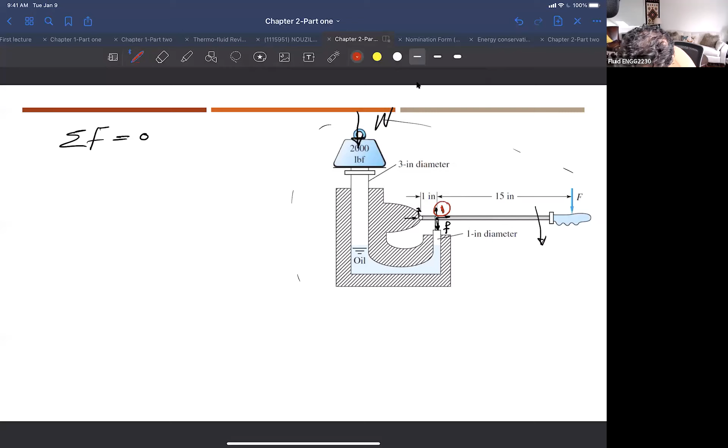But let's go point by point. Let's talk about what's happening here when this is moving in this direction. So basically you are putting some force here, F. And consider, for example, this is point 1. Let's use a different color. So this hinge here is point 1. This is a hinge here, this is a force here. If I break this element here, the force acting here will be the same force acting here. So this is F1 here, and this is F2 here. So I can say F in both directions are equal.

Okay, what else? I've seen some people talking about the moment. I think this is the right approach to take. What kind of moment? Where is the point we would like to apply the moment? Can I say that this is point 2 here, the hinge here? And now if I say that the summation of the moment around point 2 is equal to 0 for the static case, exactly. So if I separate this handle, I have this point here, point 2. Now I have F here, and I have f here.

I know the distance here. I know the distance there. The total distance is 16 inches. This distance is 1 inch. So if the summation of moment around point 2 is equal to 0, I can say that F times 16 will be equal to the small f times 1 inch. As long as the units on both sides are the same, I'm fine with that. So F will be equal to f over 16. And I can say that this is the first equation.

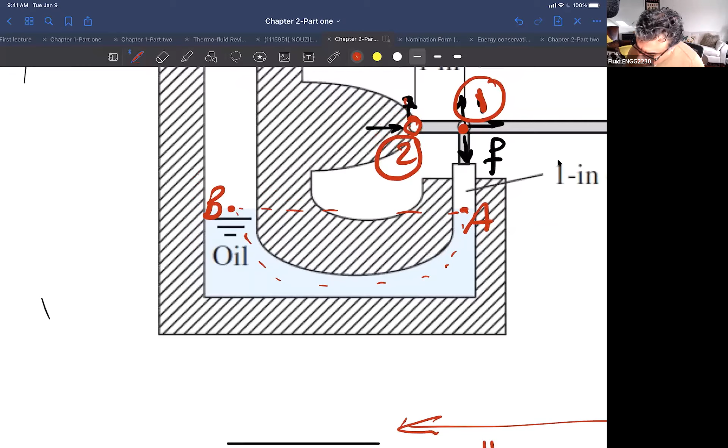The pressure inside the fluid in the horizontal plane is equal, once the fluid is connected, the same fluid. So I can expand this here, and I can say this point A here, and this point B here. Same fluid, same horizontal plane, they are equal, so in this case I can say PA is equal to PB.

Now for point A, I can relate the pressure at point A in terms of the force and area. At point A, it looks like the small piston that has a small area, that is 1 inch diameter, and the same force here, from the side that is reacting over the handle, is the same force acting on the piston if you break the element at this location. This is from the mechanics. Everything is static here.

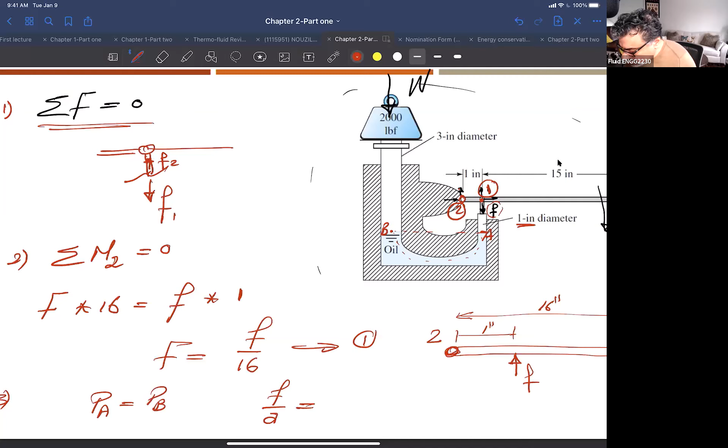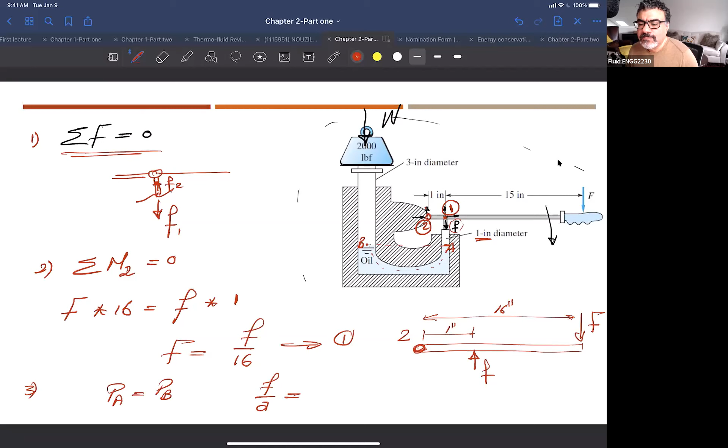So I can say, for example, this F here over the small area is equal to point B, which is W, the big weight here. So this is the weight W we are talking about, over the area, the big area of this piston, or the area of the piston that is big.

I can take from this equation F here will basically be A over A times W. And I can say that the area here is pi over 4. This is a 1 inch square, pi over 4, this is a 3 inch square. Remember, dimension is okay because all are inches. We are dividing both together, so there's no problem, no point of converting and then coming back. We divide both units at the same time.

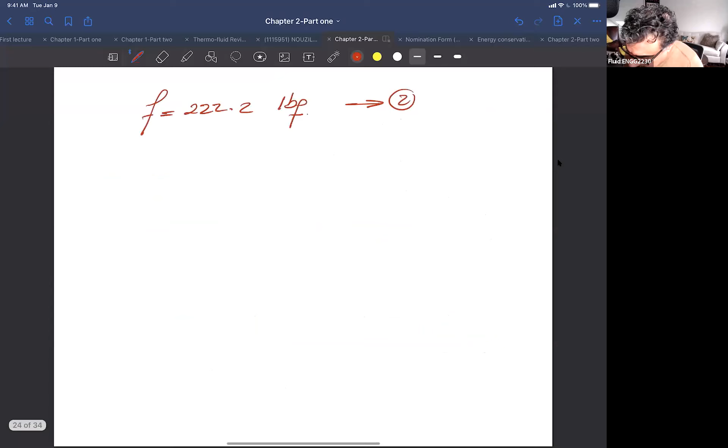The most important thing here to remember: if you put W in pound force, which is 2000, that means your F small will be in the same unit. So F small here will be, let me see when I calculated, about 222.2 pound force. So this is basically your second thing. If you go back to the first equation here, I can get F as F over 16, so which is basically 13.88 pound force.

You can see from this problem that you kind of reduced the force. First you reduce it by going from this big piston to the small piston. You have 2000 pound force, you only needed at this piston about 222. But having also this cantilever, this element here where you have the handle, you are even reducing this with a smaller value. And then you end up needing only 13 pound force in order to lift this heavy weight. Any questions on this?

As I mentioned, we're trying to do a simple analysis for a simple application in fluid mechanics. That's the idea of this course, trying to make you relate to actual applications in terms of the material we are covering. So hydraulic transmission, this is the first piece of information you have to understand when talking about hydraulic transmission. Most applications later on will be much more complex, but it's still dependent on transmitting forces based on one point that has the same pressure of the fluid, the other point has the same pressure.

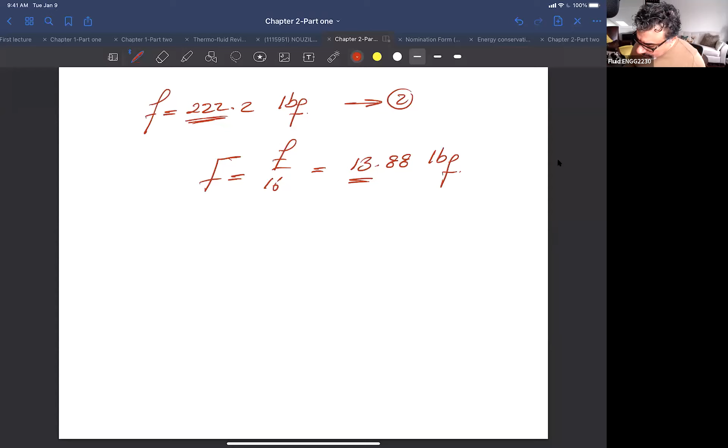It's just playing with the hydrostatic transmission forces, same thing when you are applying brakes in your car. Nowadays we have a lot of electronics, but again these electronics at the end are doing mechanical motion, doing a clamping action that is holding this disc that is rotating. So at the end, even though there's electronic transmission, when you push the braking handle, it leads to a point where there is oil — that's why when you go for service you change the brake oil. There's some hydraulic lines that basically have some oil there. The same idea: you apply very small forces at one point of this system, and you are magnifying these forces at another point in the system in order to achieve the much higher forces needed.

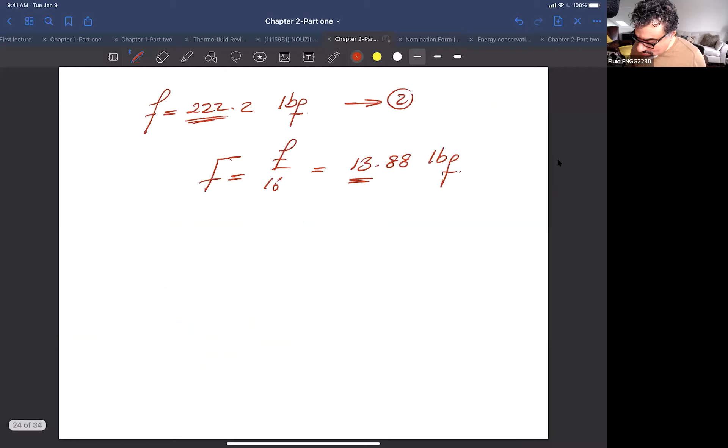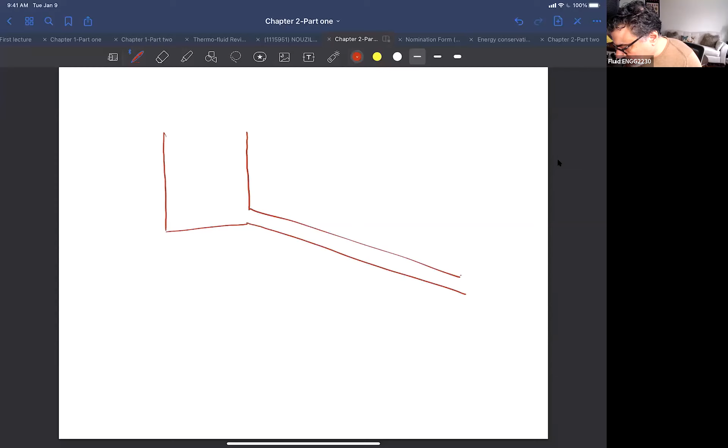Let's say, for example, if this problem is like this... I'm sorry, it's a good question.

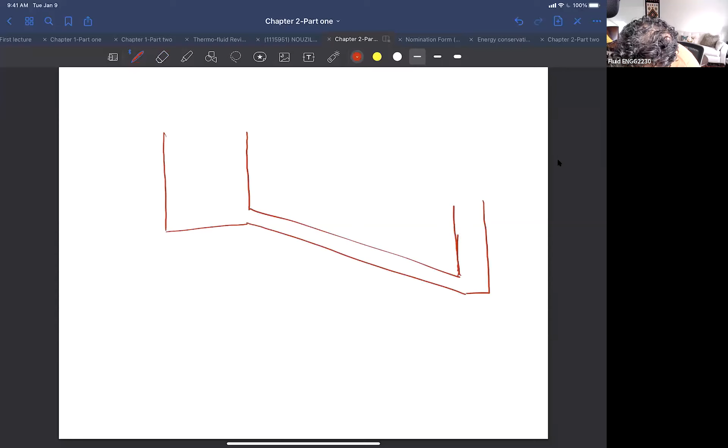So this piston area is like that. This is a piston. This is W, this is F, and this is the oil here. I know this distance here, I know this H, and I know this oil here. Specific weight is, let's say, 0.56.

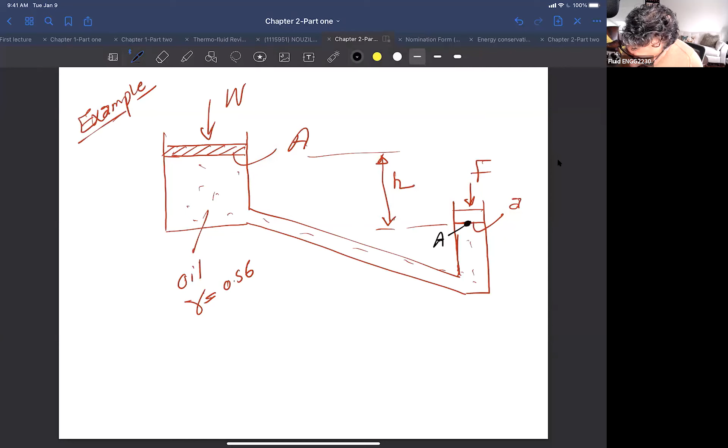What do you think is going to happen? What is going to change in this problem? Can I say, for example, in this case, that this point A and this point B have the same pressure? No. So how can I relate point A and point B in terms of pressure? What can I say about point A's pressure? Exactly, it is higher. So point A is point B plus gamma H.

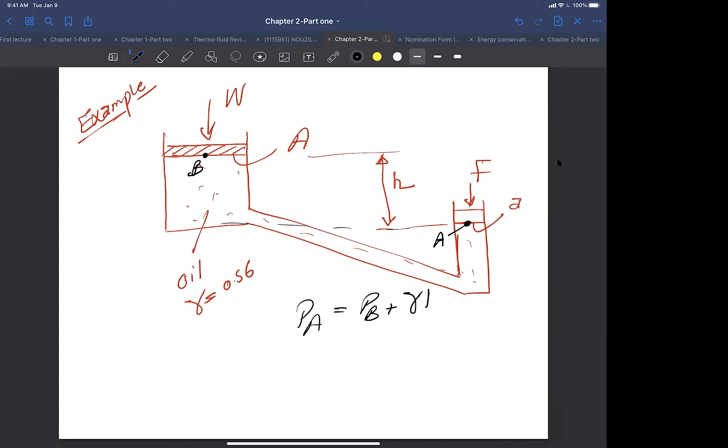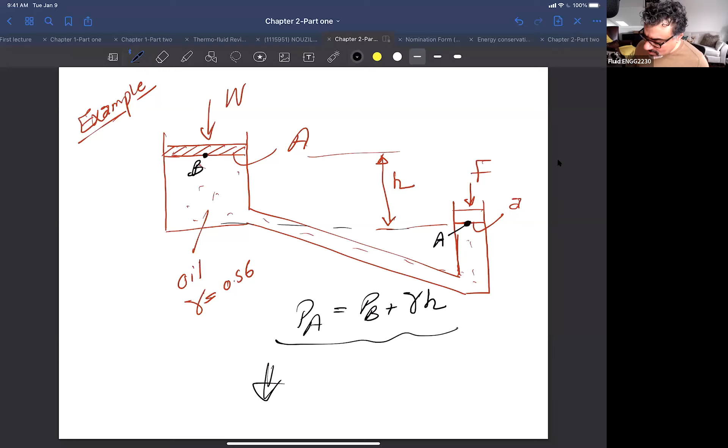You see, the only difference here is that if there is some difference between the two positions, I have to consider that. Please make sure that those putting the microphone on are muting it. So I have a difference in the height, which means the specific weight of the oil will play a role in determining the value for the second point's pressure. I don't have to complete this, but this is going to be the difference. It's just another piece of information that you add into your equation, and then you fix your other given parameters.

Okay, let's get into another topic. Today's lecture is about pressure measurement. You guys have heard a lot about U-tube manometers in your physics courses in high school, right? And piezometer tubes and stuff like that. You might have seen this kind of equipment or measuring device at some point in your science projects or science courses.

So the U-tube is a simple device using the mechanical motion of the fluid itself to indicate the pressure. Let's assume we have a tube like this, so this is a cross section. Imagine this is a fluid moving inside this, and what you did is basically drill a hole in this tube and connect it into something like a U-shaped tube. There is a fluid here, and we call it fluid 1.

And now we are using in this tube fluid 2. Let's say the other end of the tube is open here to atmosphere. So in this case, what's going to happen? Let's say, for example, if the pressure at this point is equal to atmosphere, what do you think about the fluid levels inside this tube?

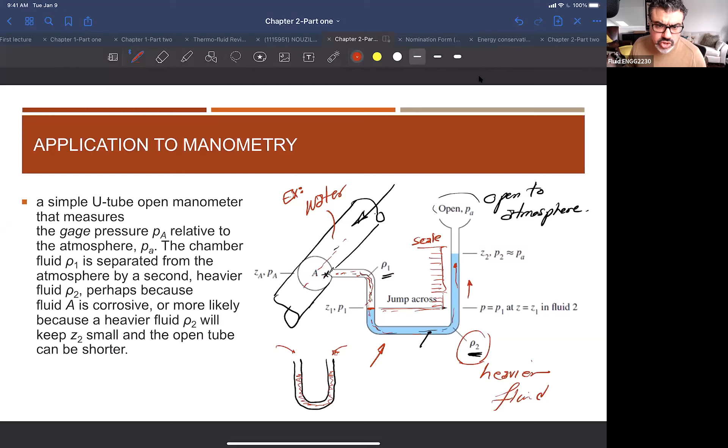I mentioned the U-tube manometer can measure either the pressure at a point, if the other opening is open to the atmosphere, or the pressure between two points. Let me ask you here, at point A and point B, what is the pressure at point A versus the pressure at point B? Let's have a fluid flow here.

A is greater than B. Some people are saying same. Okay, please don't be shy. Whatever mistake you are making here, we're just learning. You are not the first one - there are hundreds of people before you who made the same exact mistake.

Are they both open to atmosphere? No, right - this is a tube, let's say a long tube, and I'm just looking at two points inside this tube. So why are people saying pressure at A is greater than pressure at B? Why do you come up with this? Why do you think A is greater - okay, fluid flow.

Remember this, okay? Remember this, because in chapter 4 we're going to come back and ask: is it only pressure that is driving the flow, or something else? Okay, you drop some water at the top of the mountain - does it go down or go up?

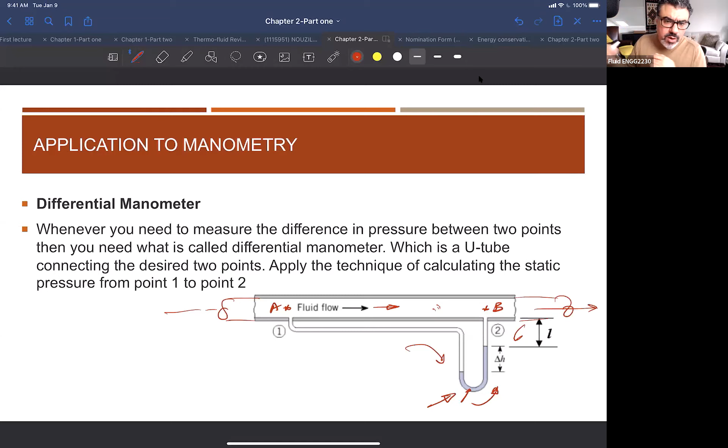Okay, so the U-tube manometer will measure the pressure between 2 points. First of all, the fluid density inside this U-tube manometer has to be greater than the specific gravity of the fluid flowing here. So it has to be a heavier fluid, right? And of course, the pressure will direct the U-tube elevation in order to show which one is higher and how much higher from one point to another point.

So I mentioned to you, if you have variable pressure, the U-tube and these kinds of devices are not appropriate for measuring this pressure. How about if I need to measure a very, very high pressure difference, let's say 20 bars? If I get a U-tube manometer, I need a very long tube in order to measure this, because the pressure value is gamma H, right? So to measure very high pressure you need a long one, and in many applications you cannot afford this.

You only use a U-tube manometer when you want to see by eye what is happening there. But it's going to be a very limited application, right? The other type of device that measures pressure is called the Bourdon tube gauge, or the pressure gauge. You will see this pressure gauge in many applications. Everywhere you go in any industry, you will see these dials measuring the pressure.

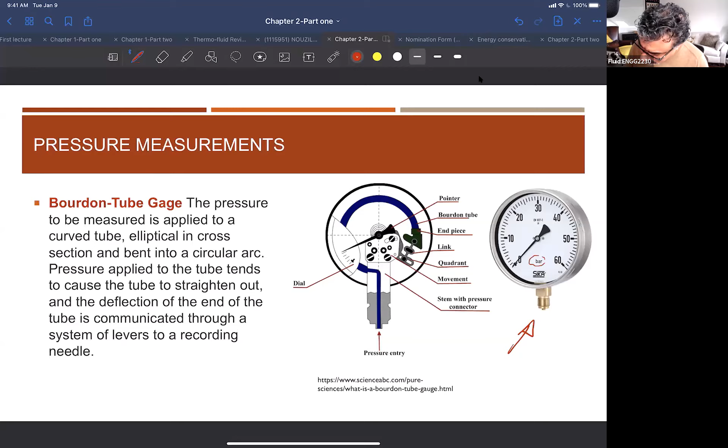And you see here, for example, the unit for this case is bar, right? The bar is known as 100,000 pascal, or 100 kilopascal. So it's just a scale of the pressure as we explained last time. But the idea of this Bourdon tube is the deflection of the tube as the pressure increases inside this tube. Simple, right? So I have a tube like this. Let me just add this. I have a tube like this.

And if you take the cross section here, you will see it's something like that. So the cross section of the tube is not a circle. It is designed, and it has a long story if people want to read more about the design itself. But it's a simple theory. When you have a fluid here, of course, this tube is closed from the other end, right? So the tube here is closed from this end, okay?

So what's happening if this fluid pressure increases? This tube will basically deflect, right? So it will be something like this. It will move according to the pressure, like this or like this, depending on the pressure inside. There are even some toys, when you push air inside them, they kind of open up, right? So this is a similar idea to the Bourdon gauge.

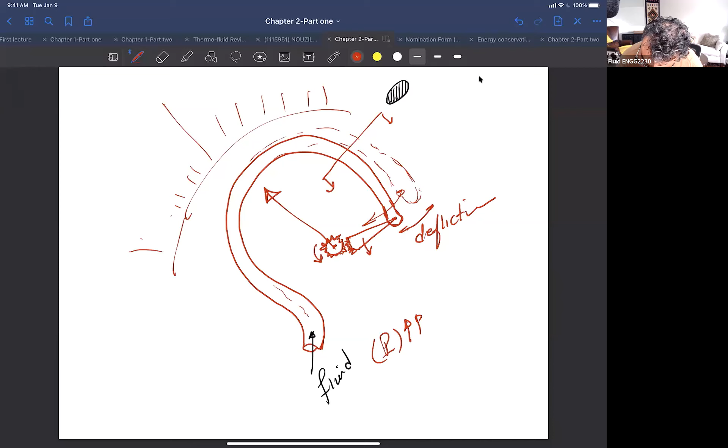How about if you take this motion and connect it to, for example, a gear here, or some kind of mechanism? Once this moves, this gear moves. And now if you have a pointer here, I can calibrate this motion, the angular motion of this gear, with respect to the deflection and the pressure here. So if I have a scale here, pressure, I can basically read it, right?

So I can find out the value of these pressures. Very simple kind of idea, right? And it's very, very commonly used in many applications. Remember that for this kind of application, you will see a lot of these dials available, depending on the pressure that you are measuring.

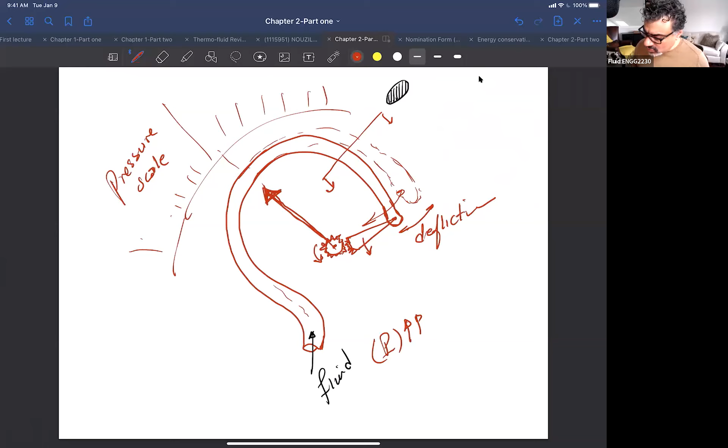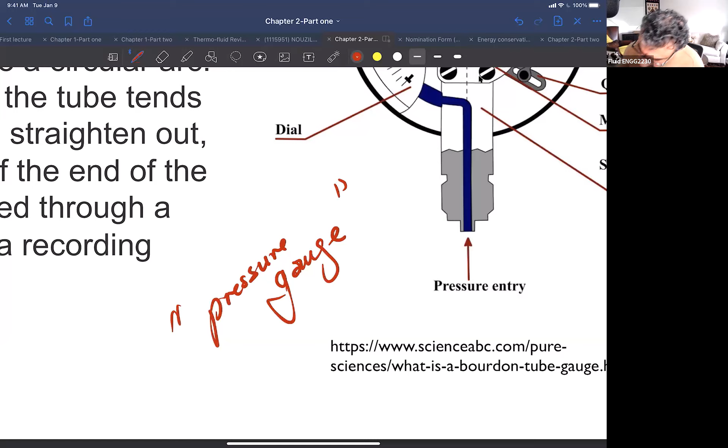So many times when you are walking around an industrial facility, they call it a pressure gauge, right? So it's a gauge where they are measuring the pressure. How about the same question I asked before? If I have a pressure that is varying so quickly, like 0.01 second, 0.1 second, even a second, do you think Bourdon tubes will be a good device for this?

No. Why? Because again, you're looking at the dial. If the dial keeps doing like this, it's going to fluctuate and you don't see what's happening, right? So you need to find something more sensitive. And of course, again, it is related to the inertia. Why? Because it's a mechanical motion. All mechanical systems have much more inertia than electrical systems. You agree with me? Because electrons can move very fast, right?

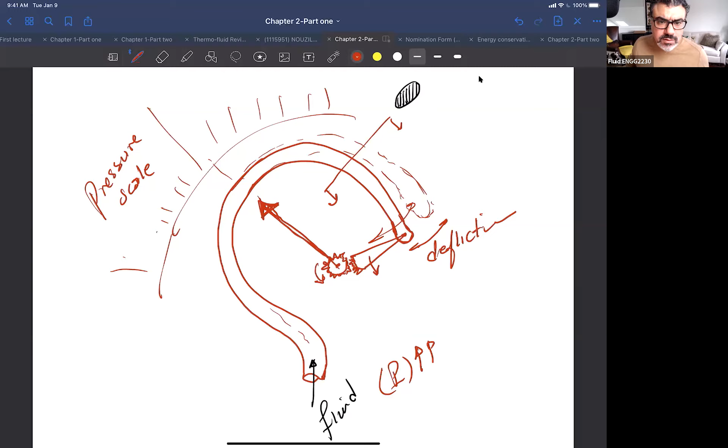And that's why we come up with a different way of measuring the pressure inside the system using something called pressure transducers. Sometimes we use a piezoelectric material that, when you actually push it, will charge to a different value, and the charge here is basically the current moving inside the circuit.

Or a wire, if you apply a certain tension to this wire. So if you have a diaphragm here, for example, let's say this is our diaphragm, and you put a wire on this diaphragm, and now we are stretching the whole diaphragm, which means that you are stretching the wire. And once you stretch the wire, if this wire is very sensitive, the resistance of this wire will change depending on the tensile stress that you are applying.

And that's why some of these devices we call strain gauges. So the strain gauge uses the resistance of a wire to relate the pressure. And how do we relate the pressure? By applying these pressure forces, which make some deflection of this device that we call the diaphragm in this case.

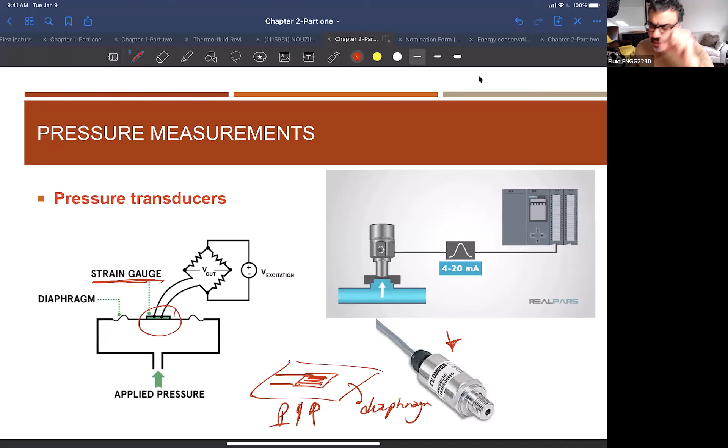Another application, as I mentioned, is related to a piezoelectric material. Once you apply a certain pressure force to this material, the charge inside this material will be different, and the current in the circuit will be different. You guys can spend time looking at this. You will see this on many websites of manufacturers supplying different kinds of pressure devices. There are hundreds of other devices for this.

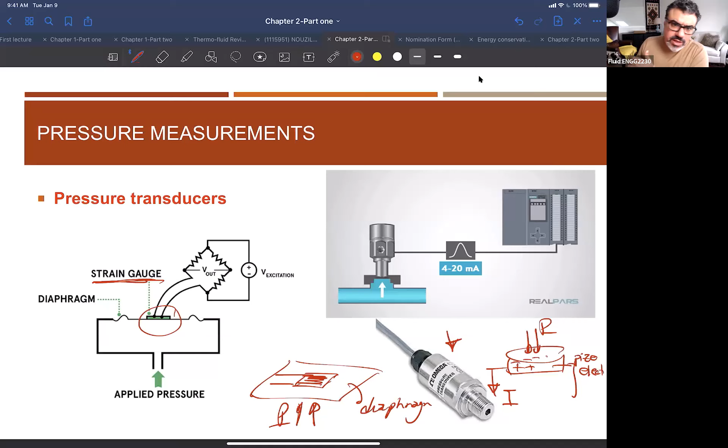What I want you to understand in this part of the lecture is that the measuring device has some inertia. If you are using a fluid to measure the pressure, you need a head of this fluid, right? If you have a dynamic pressure, you have to find a different system to measure these pressure variations.

Let's look at this example here. I have a tank, and this tank contains some air, gasoline, and glycerine. The pressure gauge at A is 1.5 kilopascal. So this pressure here at A is 1.5 kilopascal. And all the fluid is at 20 degrees C. I just need to determine the elevations Z in meters of the liquid levels.

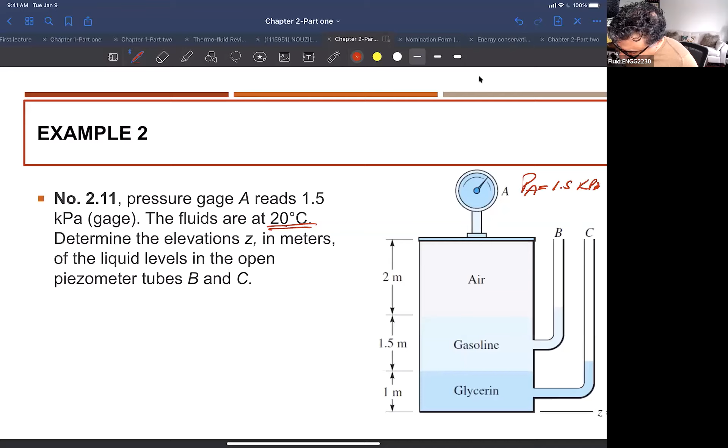So where is it? You see here, there is some distance here I don't know, right? I want this elevation from reference point Z. So let's say here, this is point A.

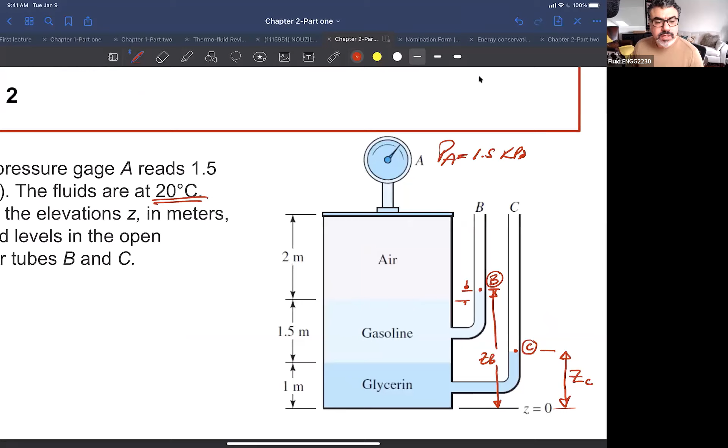This is point B. This is point C. Okay, so I need ZB, and I also need the level ZC here. Okay, so how can we start this? Let me ask you a question. What is the pressure of the air inside here?

Let me see if you guys are on the 1.5. Anyone else? Everyone knows that the pressure of the air is 1.5 kilopascal? Excellent. I saw some common mistakes in many past exams. People consider the pressure of this air is atmospheric. You remember we discussed this last time. Pressure of the air will be equal to atmosphere if the air is open to the atmosphere, right? If the air is inside the tank, the pressure could be any value, and it's given in this problem as 1.5 kilopascal. Okay, how can we start this problem?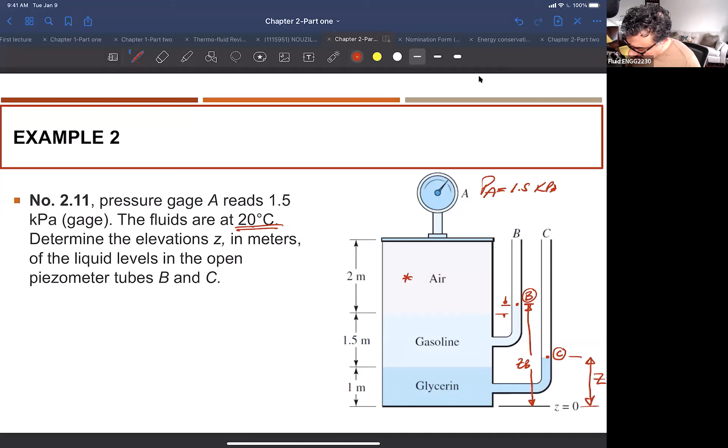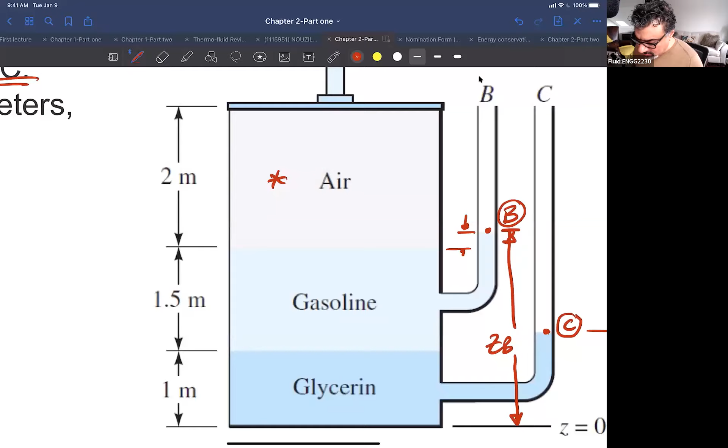Okay, how can I start this problem? Here it's very simple. Let me ask you first. Gasoline, glycerine and air. Which one is heavier here? What is the heaviest one? Glycerine, right? If you go to table A3, you will find the specific weight of gasoline is 6670 Newton per meter cube. You'll find glycerine is 12360 Newton per meter cube, right?

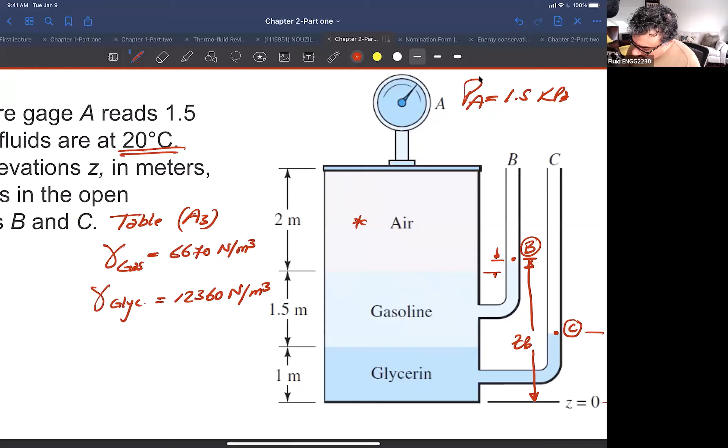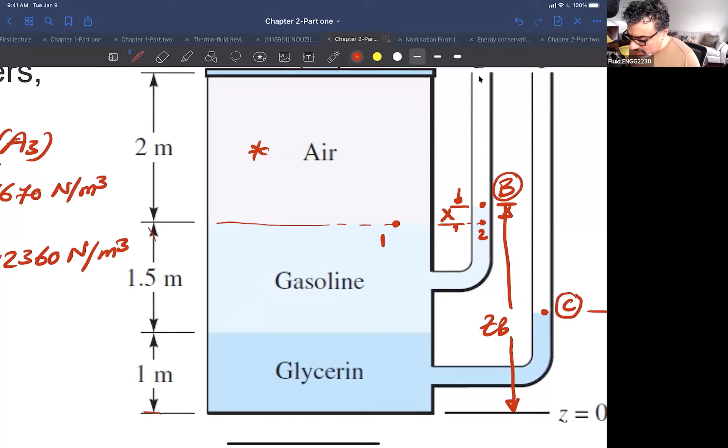And that's why it's put like this way, right? So you have the glycerine at the bottom, gasoline, and then the air at the top. Of course, these values are given. So you see here, this is 1 meter and this is 1.5 meters. This distance here, if I call it X, if I found X, I can get ZB, right? So if I call this point 1 and the same point here point 2, point 1 and point 2 have the same pressure because it is the same fluid, same horizontal plane. So P1 is equal to P2, okay?

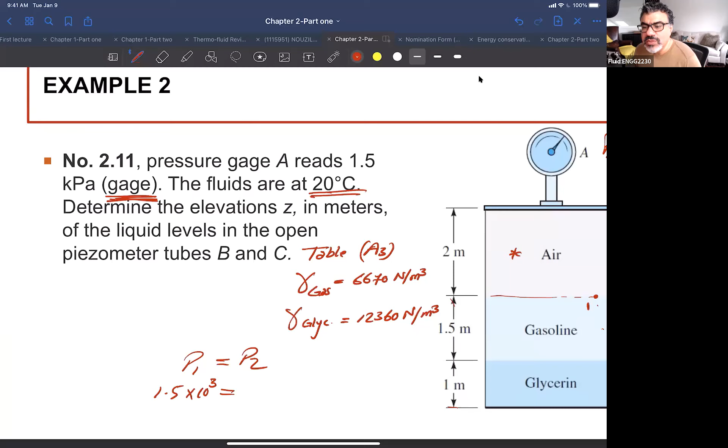And what is P1? P1 is 1.5 kilopascal. Just make sure that we are using the same unit, Pascal, because we have Newton per meter cube, SI units. This is kilo, so we multiply by 10 to the power 3: 1.5 times 10 to the power 3 Pascal, which is Newton per meter square. How about P2? This is open to atmosphere. What is the atmospheric pressure in this case? 0. Why 0? Because the value for the air given in this problem is gauge, which means the reference is atmospheric, which is 0, right?

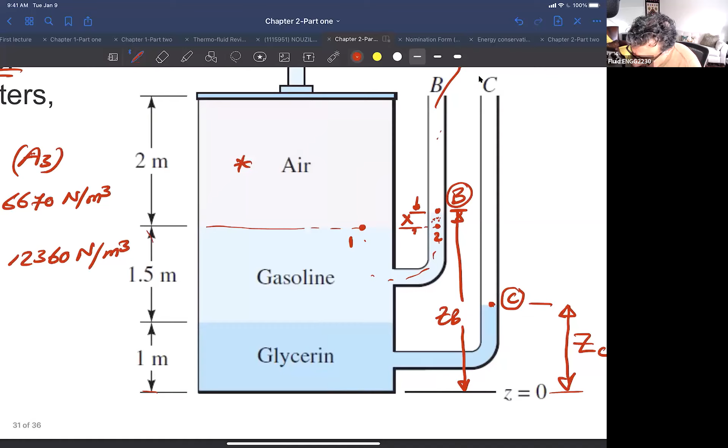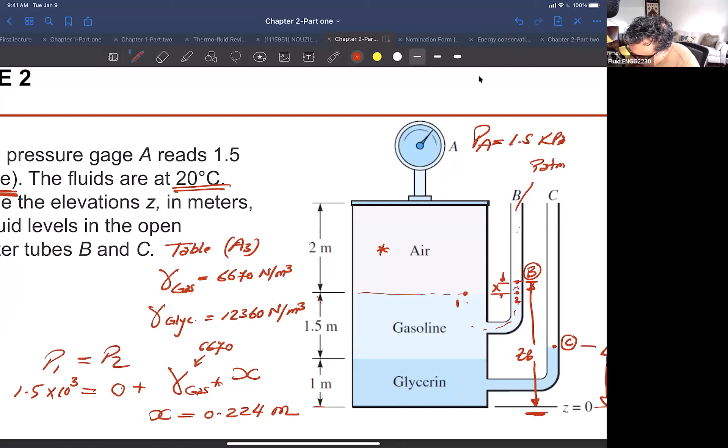So I have 0 here plus this distance, which is filled with gasoline. So it's gamma of the gasoline times the height of the gasoline, which is X in this case. So I have 6670, so I can find out X. When I calculate it, X is 0.224 meters. If I want the level not from this point but from the reference Z, I just add this distance: ZB is equal to X plus 1.5 plus 1 meter. So it is about 2.724 meters.

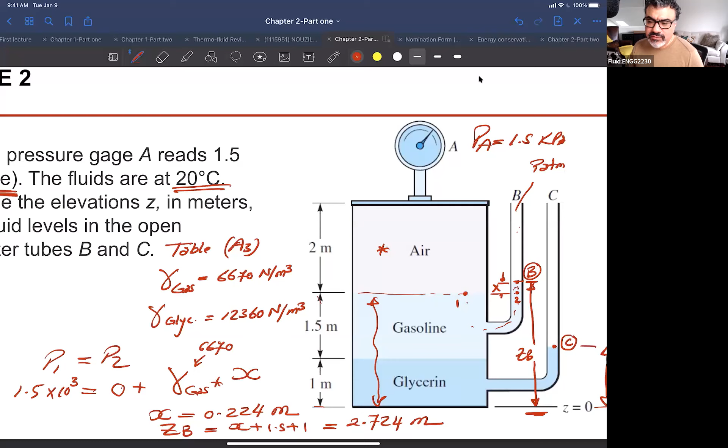What was the 0 again? The 0 is the atmospheric pressure, because the atmospheric pressure is our reference, because the pressure of the air is given in gauge. That means we are using the atmospheric as a reference. Okay. Sorry, I just added this without. Oops.

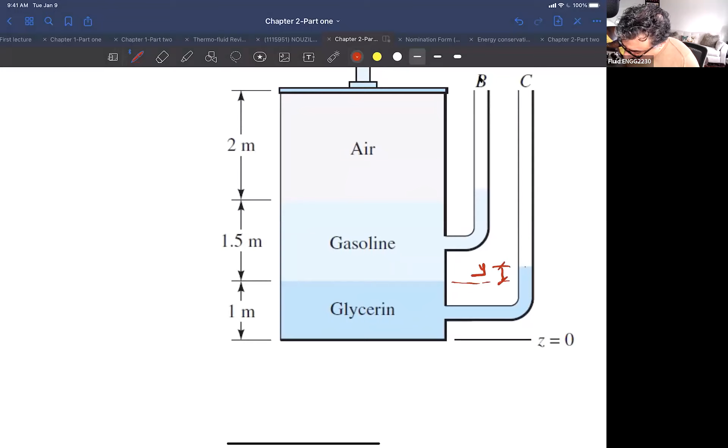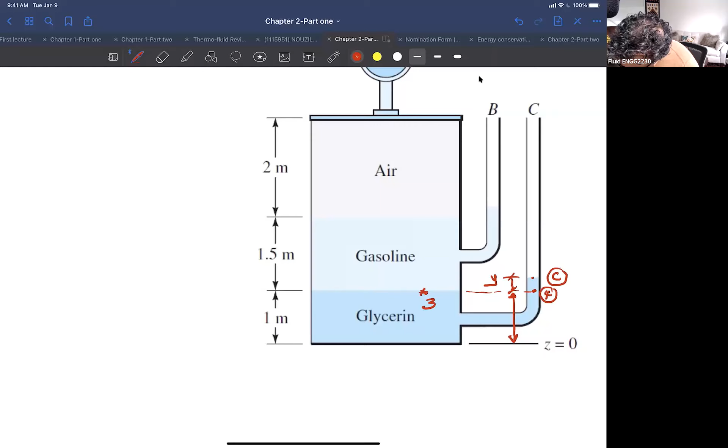So how about this elevation here? I know this distance also. It is y, right? If I know the distance, I will just add this value, so I can find out Z of point C. In this case, this is point 3 and this is point 4, right? Same horizontal plane, same fluid. So P3 is equal to P4. So can you tell me what is point 3?

What formula, Mohammed? What formula did we use? You didn't even start there, right? Gamma H. Well, I don't call this an equation that we have to give you in order to solve. These simple concepts have to be in your mind.

Okay, so in this case, what we have for the pressure at point 3? No, don't be sorry. Don't be sorry. I want you to remove from your head that we have to really find out the formula and apply it. Okay. So I've been talking about this all the time. Please start from the basic principles.

There are some people who, for this kind of device here, have an equation at the end and just substitute the values. That's not the idea. If you start from the basic principle, the same way as I'm doing now, you don't need to understand so many formulas. In a few slides, I will show you some equations that will be given to you, because you don't have to memorize them. Okay. Don't ever be sorry about any question you ask.

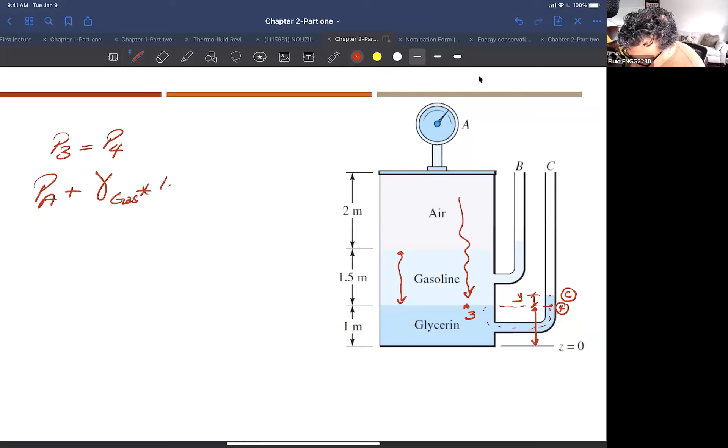Okay. So P3, P4. What is P3 in this case? What is P3 in this case? Again, 1.5 plus what? You are here, you are carrying all these loads, right? So in this case it will be the P of the air plus gamma of the gasoline times the H of the gasoline, right? So it's 1.5. Now we are at point 3, okay?

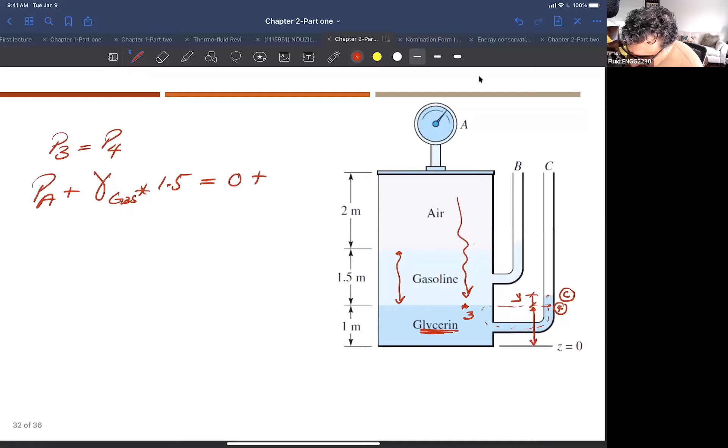Equal to, what is P4? Exactly 0 plus, if this distance y is a distance of glycerine, right? So I have a distance we call y, times gamma of the glycerine. Okay. So this is 1.5 times 10 to the power 3 plus gamma of the gasoline, 6670, times 1.5, equal to 0 plus y times the glycerine, 12,360. I can get y from this equation simply by calculating this number.

So it's 0.93 meter. And it looks like Z of point C is Y plus this distance here, right? So it's 1 plus Y, which is 1.93 meters. Okay, they're very simple types of problems. Okay.

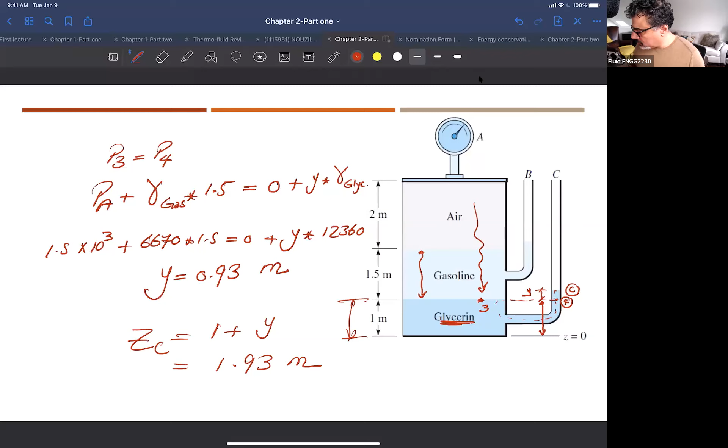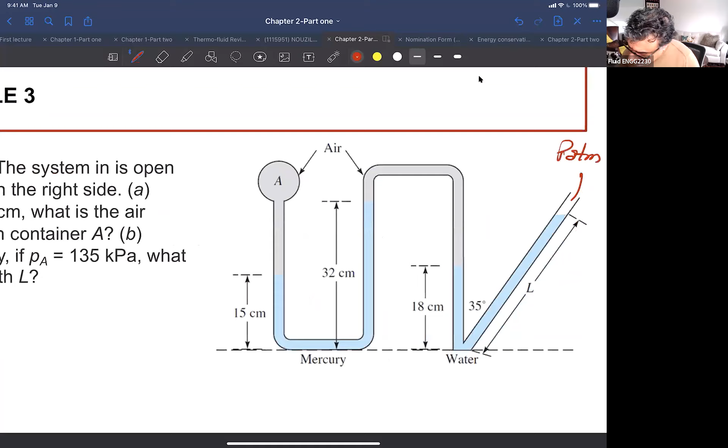There are some other problems. I want to get into other parts of the material, so we'll just start this problem and then you can complete it yourself. Okay. One important thing about this problem is the system is open to atmosphere. So this is atmosphere. Okay. On the right side, this L here is given as 120 centimeters. And remember, this is an inclined surface.

Does the pressure increase in depth with the vertical distance or the inclined distance? It's the vertical distance. Remember, it's basically because of the weight, and the weight is acting vertically, right? So I don't care about any inclination of the fluid level. Between this point and that point, it's only changing because of the gravity force, which is acting in the vertical direction. I think some people missed this point here.

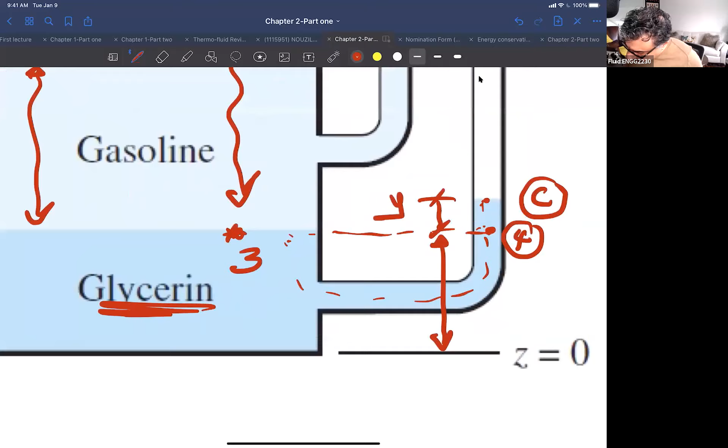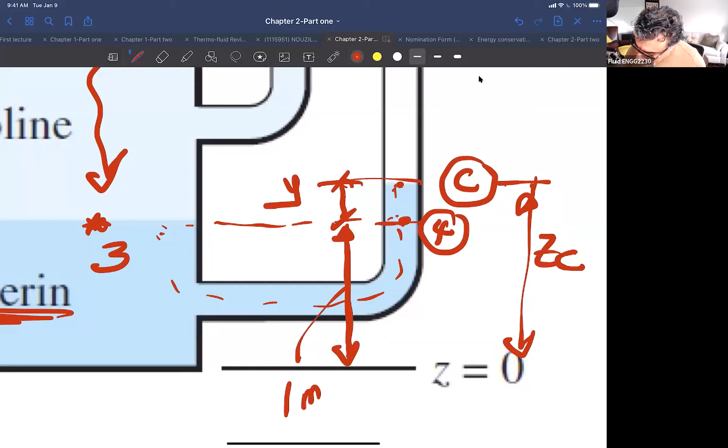I'm getting Y, right? And I need ZC. So what does it have to be? It has to be this distance plus this distance, right? This is 1 meter. So you can just add 1 plus Y to get ZC. Let's go back.

Okay. So the first thing is make sure that you understand what we're talking about here. This is 35, right? So what is the distance here? This is sine, this is cosine. So this vertical distance here is L cosine 35. Okay.

The other trick in this problem is you have air on this side, and you have air on this side. Okay. And he's asking about this PA. So we need to find this PA. And then you can solve the other problem: if PA is given, what will be the length L? But the first problem here: if L is 120 centimeters, what will be the pressure at point A?

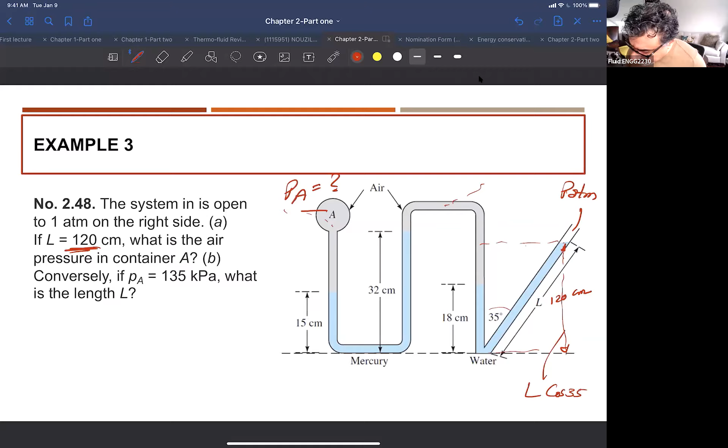There is air here, and there is air here. What do you think the pressure is at this point and this point? They both have air, right? Agree? Same, right? Yes. Everybody agree on this? The pressure of this air here equals the pressure of this air here?

If the air is in the same space, like the air in my room here, and the distance is, remember we talked about the distance for the air, it only changes if you are flying an airplane at a very high altitude. But once you are in the same space, the pressure is the same, right? Let me tell you something, okay?

So the pressure, let's say, for example, this is 0.1 here. Okay, let me just here. Well, let's call this 0.1 here, okay? And okay, so we have air here, so I have the pressure at this point, and this pressure, let's call this 0.2, or I don't want to call it that, okay, just let me call it A, B, C. This is B, this is C, this is D, right?

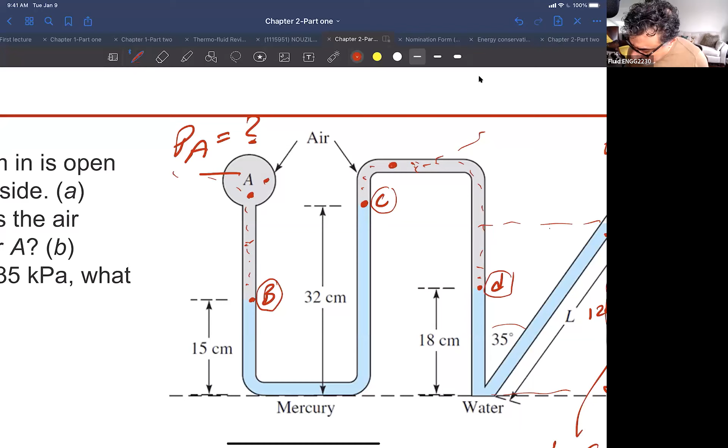Okay, so do point B and point C have the same pressure? No, right? Point B has the same pressure as this point here, right? Let's say B dash here. Why? Because it is the same fluid, horizontal plane, static, everything, right? So I can say P at point B is equal to B dash, right? And what is the pressure at point B? Is it the same as point A or not?

This is all air. Yes. Why? Because it's all air, and the elevation of the air doesn't change the pressure that much, because the density of the air is very small. So point A here is basically equal to this point B dash. Okay, this is the first equation.

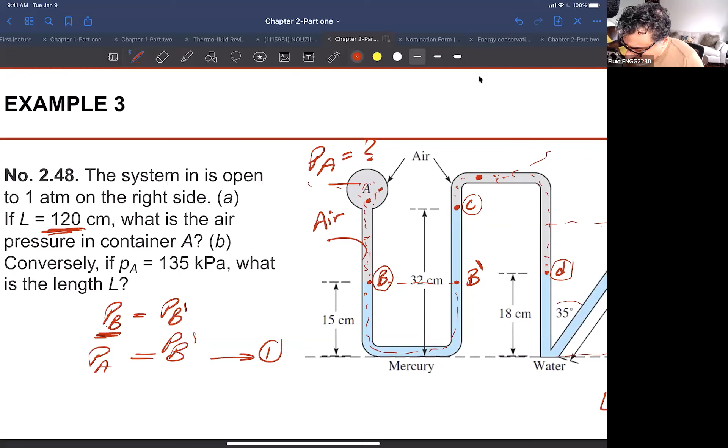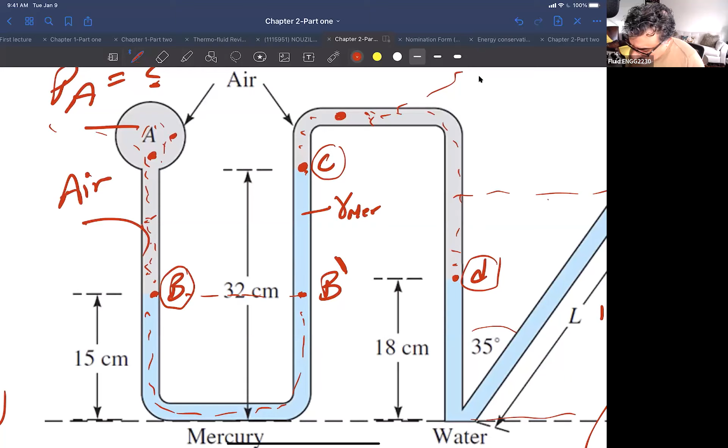Okay, how about point C and point B? Which one is higher? B or B dash, right? So B dash is higher because it's basically at the bottom, and then you have a fluid here that is mercury, right? This is gamma mercury. So I can say this point B dash is equal to point C plus gamma mercury times H, which is this distance here, 0.32 meter minus 0.15. So the distance here is this whole distance minus this distance, right? So this could be your second equation, okay?

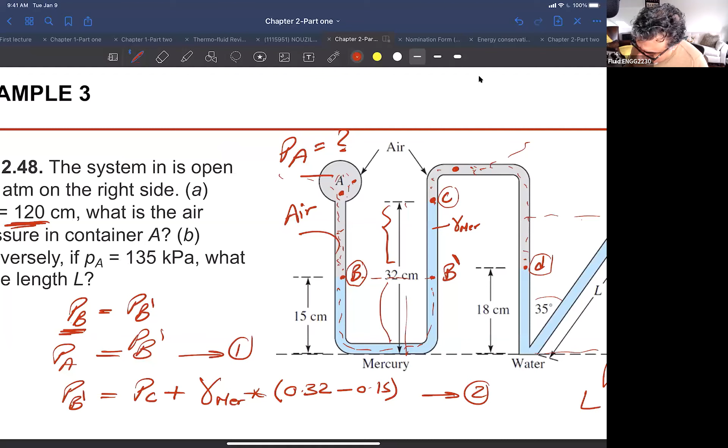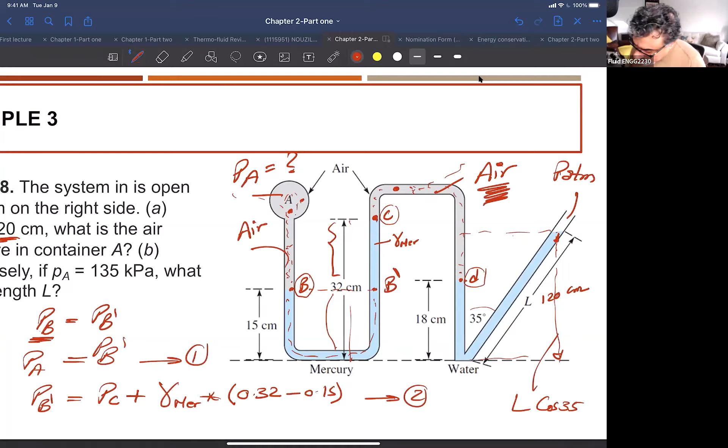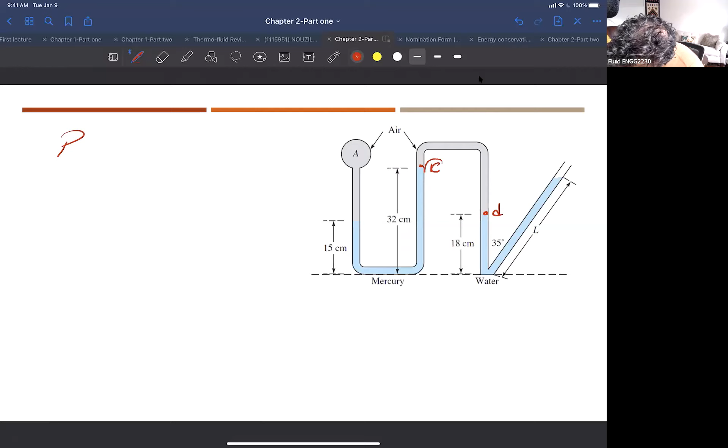How about point C and point D? D is higher. Somebody is saying D is higher. This is air. You still think it's higher? It's the same, right? So basically, in this case, point D, this is point C. Okay. Yeah. So point D is equal to point C, right? So basically I have this, right?

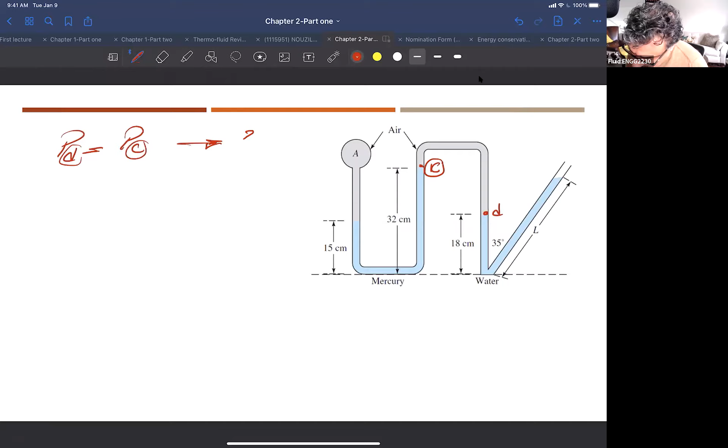So I have a problem here. So we have, this is 1, 2. I can say this is number 3. How about this point here? I can call it D dash. How about point D with respect to point D dash? So remember, you see here, point C, this is point D, right? D dash here from this side is what? This is atmospheric. And it's going to be some distance here, right? So what is this distance here?

So PD is equal to PD dash, which is 0 atmospheric, plus, let's say this is our X, right? What is X here? So if this is 35 degrees, it's going to be this distance, you see this distance here. So I need this distance. So I can say that it is this whole distance minus 18, right? So this whole distance, remember, is L.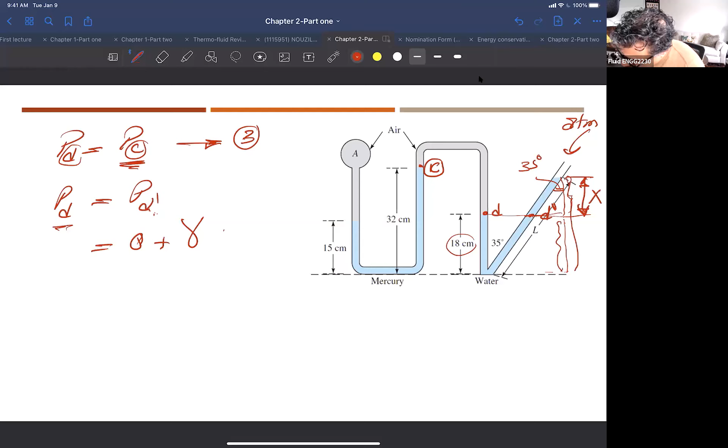First, it's gamma of, what is this? This is water. So it's gamma water times the distance here, which is L cosine 35° minus the 18 centimeters. Okay, of course you have this. It looks like it's going to be straightforward. I know it's step over step over step, but this is a way that if you have any complex problem, you can divide it into small little things. Okay.

I don't know what you mean, Adam? The shape is given in the problem. We give a vertical. I don't think you should change the layout of the problem in order to solve the problem. Okay, let me just conclude this, and then I will give you a simple trick that people use all the time to solve these manometer problems, right?

But let's say here, for example, this is your fourth equation, you're taking PC and putting it here, right? Because PC is PD, right? So from equation 3, you can put it in equation 4. And now from here, you see this PC here, you can put it in equation 3. And then you have PA here, right?

So you substitute from equation 1 into 2, and from equation 2 into 3, and then from equation 3 into 4. You will get the number that you want, okay? Some people already know fluid mechanics fairly well.

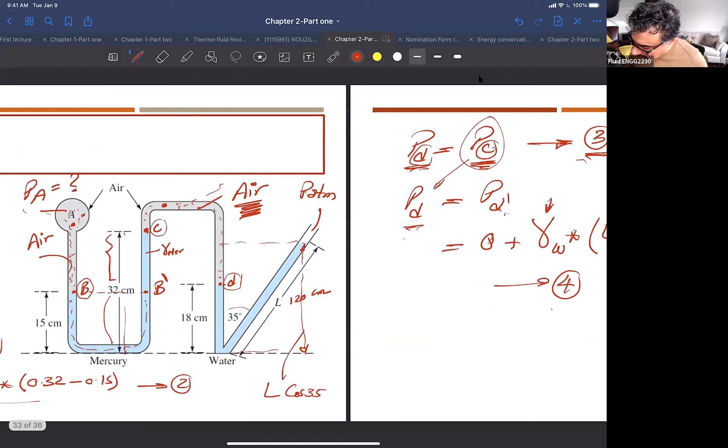But it has to be in the same fluid. So people will say, for example, let me just do this. They said I started with one point, one side. So this is P_A, okay? As I go down, okay, I go down like this, but this is air, it's gonna be the same, right? So now I'm here, okay.

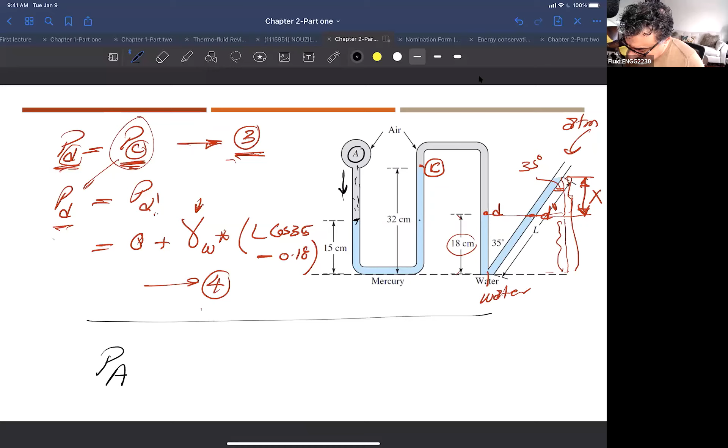So every time I go down, I add; every time I go horizontal it's almost the same, right? So in this case, P air, all the time is just P air. There's nothing increasing here because it is gas. I move here, no change, right? Now I'm going up, so I decrease, right? Because you go down, you increase pressure; you go up, you decrease the pressure.

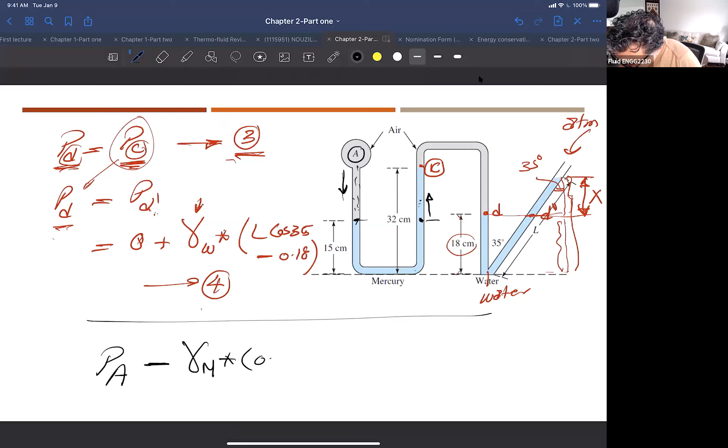If you go up like this, that means it is minus. And now you are basically in mercury. That means gamma mercury times this distance here. So it is 0.32 minus 0.15.

I go from here to here, nothing changed. To here, even nothing changed. Why? Because this is all air. You see here? So now I am still there, right? Still the same value. Now I go horizontal, same value, okay.

In order to go all the way, that means I have to go like this, so it's gonna be minus again. But minus will be basically what? Minus this distance here. And what is this distance? It is L cosine 35 minus the distance here, which is 0.18. Equal what? I am now here. Equal what? What is the pressure here?

Zero, right? If you look at this equation and you look at the combination of equations 1, 2, 3, and 4, and you put all the equations together, you will end up with the same exact equation here. So some people, they just go one step at a time. You increase as you go down, decrease as you go up. Make sure that when you are going horizontal, you are in the same fluid, okay?

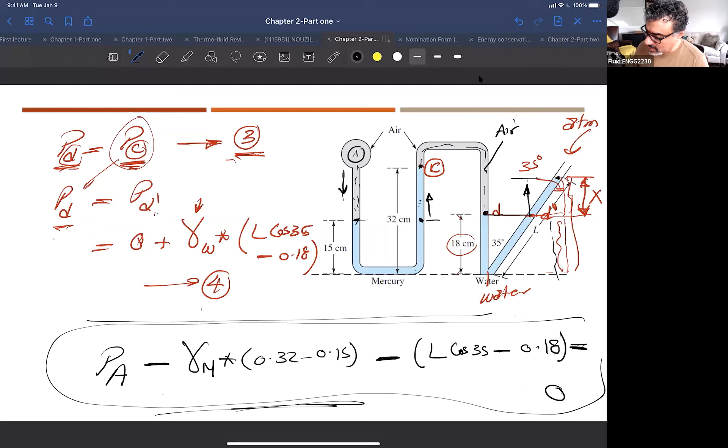So it's only 10 minutes left for this lecture, and every time I spend so much time than I expected. I want to start a new topic, but I don't want to start it at the end of the lecture, so I will just leave it to next lecture. Any questions?

Okay, not sure if it's a question or it's... yeah. I have a question. So let's say it was mercury and water.

This is hard to explain without showing you. What do you mean mercury or water? Could I annotate something on the board? If I'm able to, can I just show you a diagram? Sure. So this is not a U-tube, but let's just say this is.

So up to here is water, and then here is mercury, and then what is the line in between? What is this line? Sorry, it's a separation. No, oh, there is no separation like this. There is nothing like this that can happen. You cannot have a fluid like this. You cannot have a liquid standing against the other fluid without one going up and one going down.